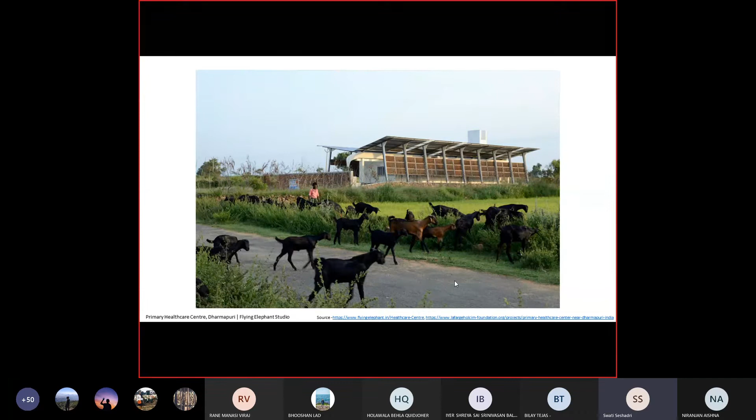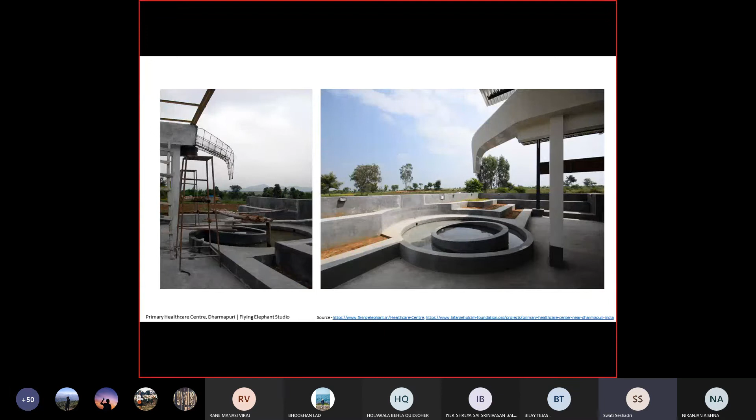These are seen, and I think Kimaya covered the materials and how etc. So I'm going to move past that a little bit and go towards the ground plan.

As you already know, this project is a healthcare center, a small kind of medical center in Dharmapuri, which is in Tamil Nadu. It has quite a hot climatic condition.

What you see on the ground plan is basically one entrance ramp taking you up. To the left is your water feature, which is the collection pond. There's a bit of landscaped area behind that, a stepped terrain that has been created. Centrally located is the building, enveloped by a skin made of thatch mats etc. To the right is your water tank.

So what we are looking at is just trying to understand how this entire thing actually works with reference to your building and how the water system comes together. Basically the whole central spout or water element running through the roof, which holds the roof together, is becoming a spine in the center.

So you have a larger water body here, and you have the water tank to the right. What happens essentially is that there is a ridge somewhere in the middle, so half the water is then sloped towards your water feature.

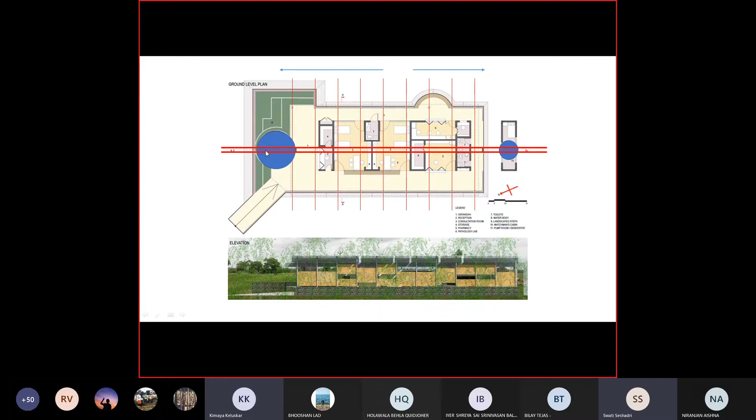Swati, just be louder. I have to be louder because of the background disturbance. You're in the computer lab, no? Yeah, yeah, am I? Is it better now? Yeah, I think so. Aaradhya, are you okay with it? Her voice was muffled because of that background disturbance, so it wasn't very clear while she was speaking, but now it's better, right? Yeah, now it's better.

Okay, cool. So you have your water feature to the left, and then you have your water tank to the right. There is a certain ridge in the middle that will slope your water half to the front and half to the back.

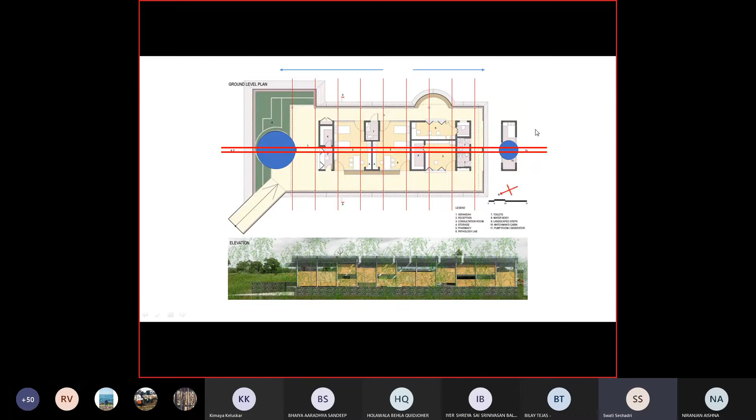So essentially, when you receive rainwater, half of it runs off to your water pond in the front of the building, and the rest goes to the rainwater harvesting tank, which is in a vertical format that has been designed.

I'll just show you this. So that's your tank, which is vertically stacked. Somewhere at this level is where the inlet for the rainwater harvesting tank is, and you'll hold that water for a while, as long as you need it, and that can eventually be used for landscaping and other purposes.

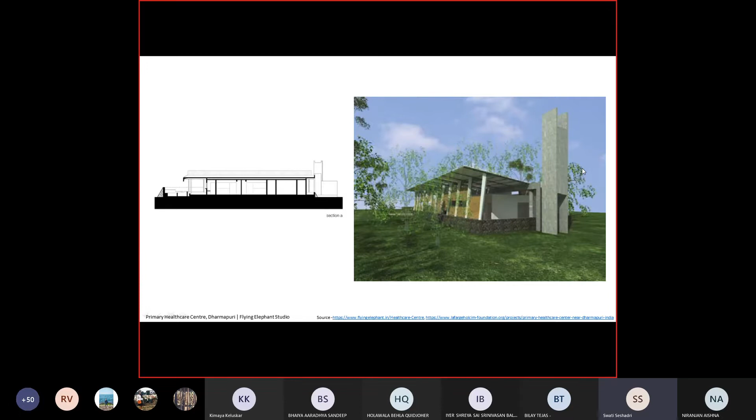I know this image is not the clearest, but this is what's available. So essentially, to understand how this system works, after your spine has taken half the water to the tank in the front, to the pond in the front, and half to the tank at the back, the overflow of both these is connected to a recharge pit.

So this water, when it overflows, goes into a recharge pit here. You're recharging the groundwater in a very arid situation where the groundwater is less and the soil doesn't have much water already. Whatever overflow is there at your rainwater harvesting tank will also run into your recharge pit, and that's how you recharge your groundwater in this area.

The toilets are connected to a septic tank at the back, where it's getting treated and then eventually dispersed into the ground. This is a section showing the same thing we discussed - half the water going to the front and half to the back, connecting into this tank, which then overflows into the recharge pit and eventually gets used in that manner.

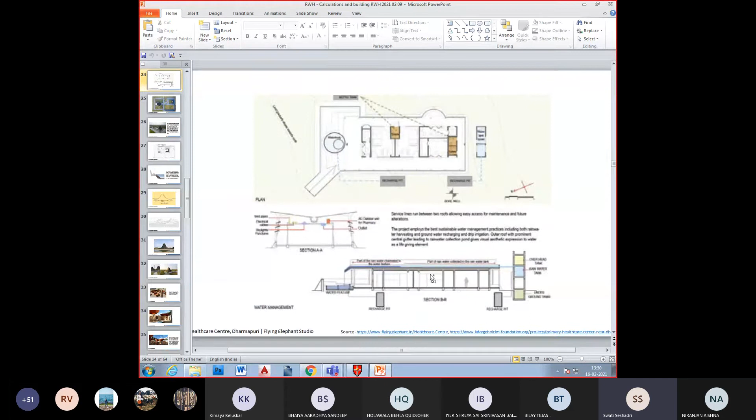So, Swati, can you zoom into the details? Can you zoom into the section and show them? The image that's there is not a good image. But I can just run through it with my cursor if it's visible now. Yeah, your cursor is visible. Okay, I'll just show you some of it.

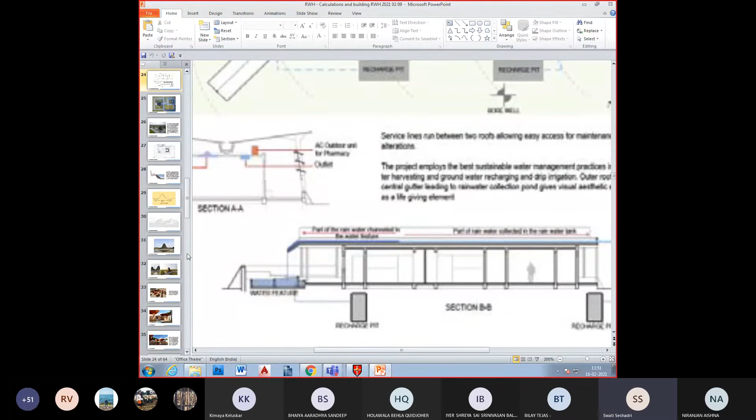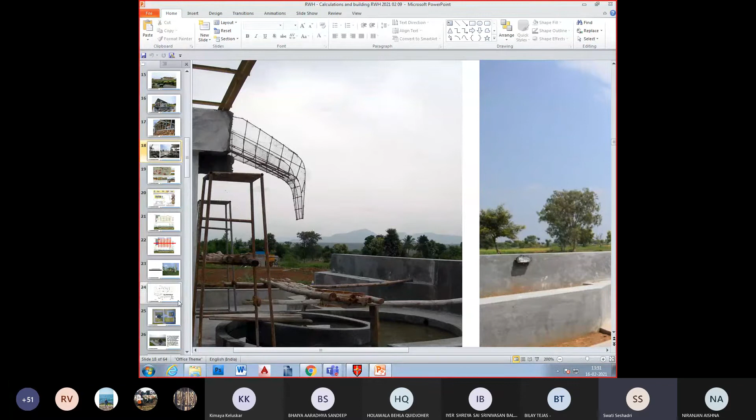This was one of the interesting images of the construction situation where the spout is sloped entirely to allow the water to run off quickly into this water feature. In this area, the same thing is happening in the section shown. I'll show you through this section, I think it will be better. Basically this is sloping towards the water feature, and then at the back it's connected into the rainwater harvesting tank. That's what's happening in this very unclear image.

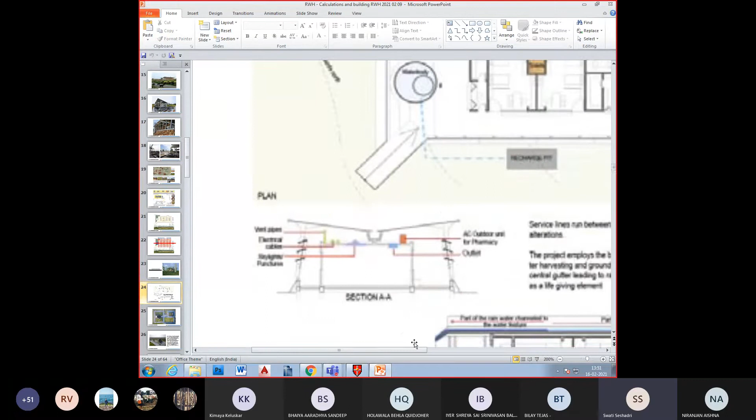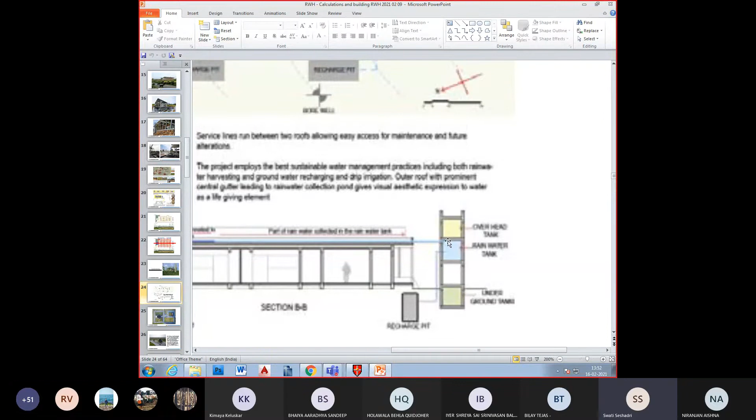So half of it is in the front, and the rest of it is sloping towards the back. The connection is at this level, so that there is an inlet to the rainwater harvesting tank.

Is that clear? Should we move to the next one, Kimaya, or is there anything you would like to add? No, I think you've covered it. We can go to the next one.

Kimaya, I had a doubt. I was using a similar system for my project. The water feature towards the left, that is the pond - at what height should the overflow pipe be in the pond? If the depth of the pond is 60 centimeters, that should be calculated by the amount of rainfall in that area. But is there any calculation that decides the level of the overflow pipe?

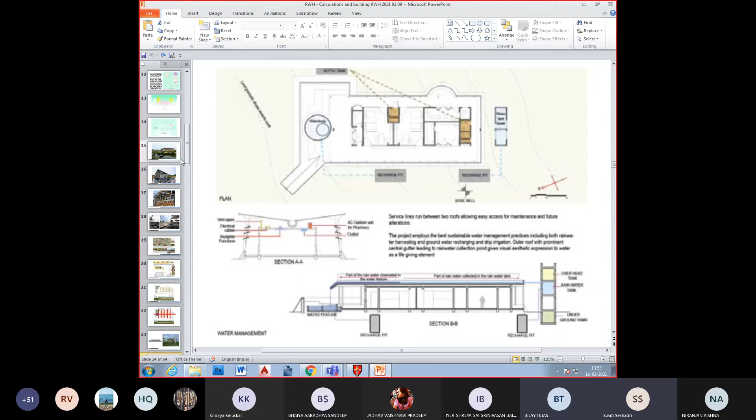No, there is no such calculation to decide the level of the overflow pipe, but as you see in this image, it's right at the top of the rim. The rim that you want as a clear rim - like in the inner circle you see, it's the depression. When I say depression, it's the slant where the cursor is, that's the lowest point, and then there is a highest point. So it's more like an inbuilt kind of overflow that they have created. As soon as the water reaches this lowest point of the rim, any excess water is going to overflow into the next ring.

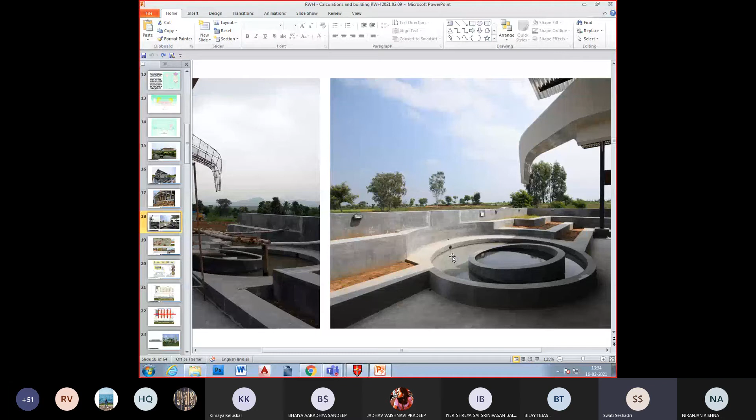Now in that ring also, if you see, there is a cutout in the circle on the left hand side - that is another overflow pipe. The moment there is certain water trickling, there will be other water also trickling in. Only in the monsoon will the whole pipe have water trickling out. Otherwise in other seasons, it's going to be a little water - more like a stream that runs across. Thank you. Welcome.

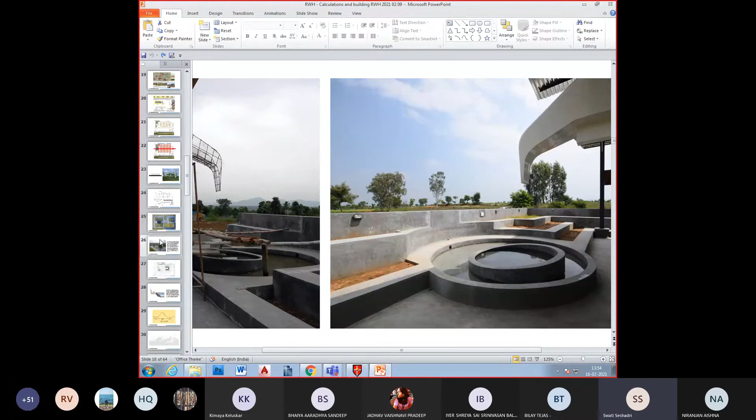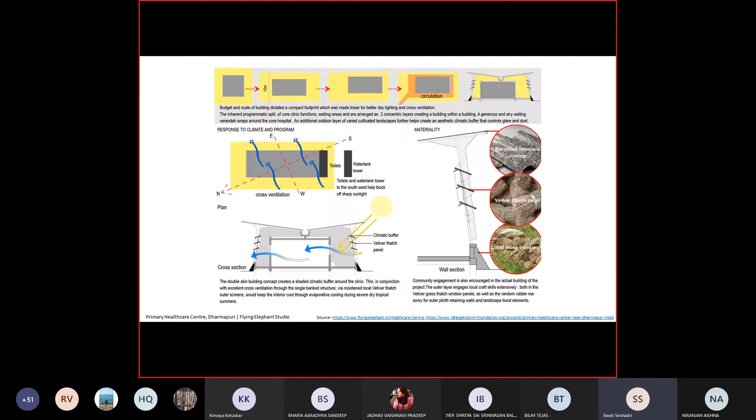Just to add to that - another thing is that aesthetically, sometimes you want to have that feel of the infinity pool, where the water is right at the topmost rim of the built form, so that you feel there is a seamless line of water, and that edge is no longer seen as a trough. So depending on what you want in terms of the aesthetic appearance of that system, you can decide your overflow pipe accordingly.

Okay? Okay. Yeah, continue, sir.

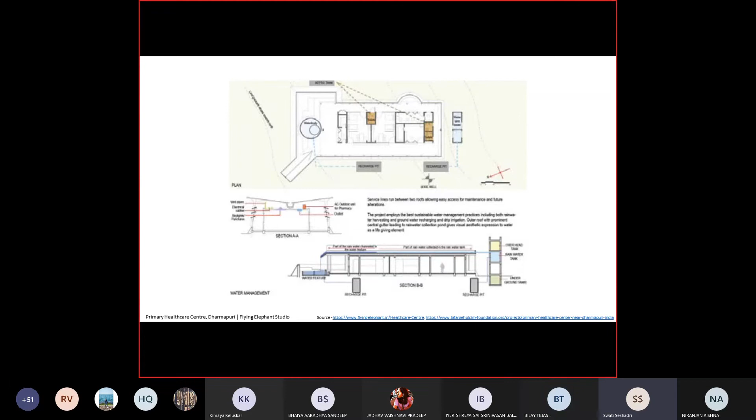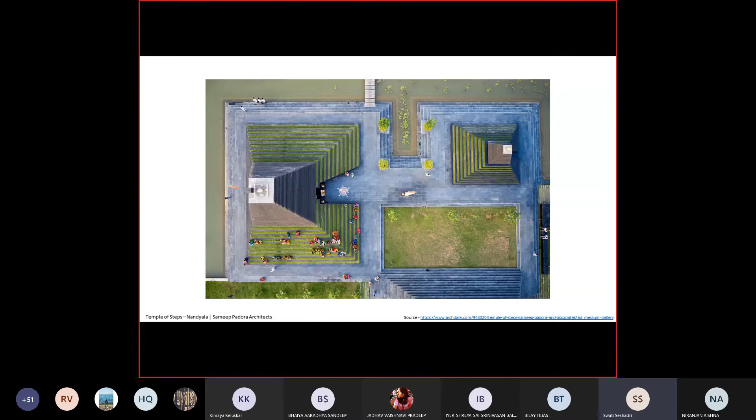So we're just looking at another project which also has an interesting water story, and that is largely the intent of the project. The rest of it, in terms of architectural intervention, is also woven around the same idea of water and experience in the building. This project is based in Nandyala, Andhra Pradesh, which has an extreme climate - the heat they experience is extreme. It's also done from the point of view of trying to keep the entire space cool, but also, because it's a place of worship, there is that connection with water that has been integrated.

So this kind of replicates the whole idea of a temple in South India, and the idea of a stepwell or the Pushkarni tank, something we had seen even in Hampi, where the stepwell is called the Pushkarni tank, the water tank.

Basically, what's happening is there was a canal system already present in this area, which was running dry because of the extreme climate. So all the chili farms etc. were not getting water through this canal system anymore, but essentially the canal system was built for that.

So this intervention tried to look at regeneration of the groundwater again, and the water from the quarries was taken in here. The overflow from the quarries was channeled here, and this water allows for groundwater seepage to happen and regenerate that entire area.

Basically you have a kund in the front and a kund in the back, and this water is seeping into the ground. So they are recharging the groundwater through this project, and the rest of it is stepping up, with your temple formation in the same manner.

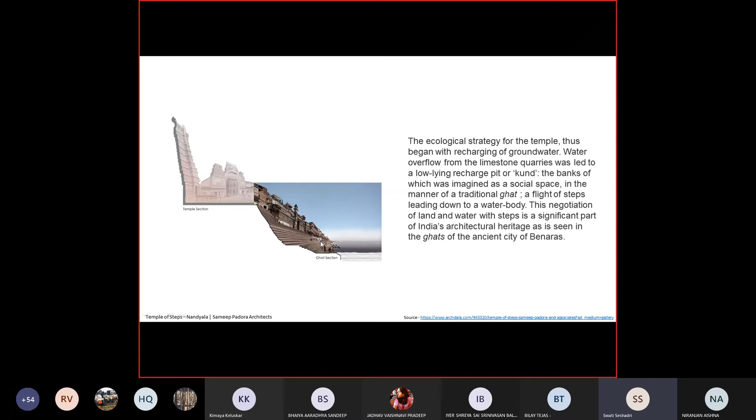Essentially, what they're trying to do is section the ghat itself. The ghats were also built to have this connection with water for easy access, and the water was used for multiple reasons. Also importantly, because the shrines were placed along these areas, the connection between water and shrine was pronounced through the building of the ghats.

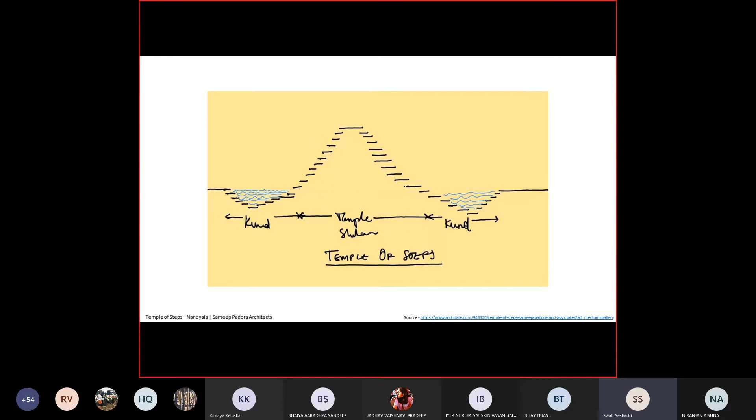So it's the same idea taken into this project, scaled down and applied as an experience. Holding water on all four sides reduces the temperature within the temple itself and keeps the shrine area cool. So these are a few details that you see.

These are basically how the junction between the step and the water will happen, whether one would do it in brick material or concrete material, but that's left to the construction aspect. These were done in stone essentially, in black stone.

The same material is stepped up to create your temple shrine itself. That's the walkway, supported with a member at the bottom.

See the summer, the water level can rise and fall. Coming back to where the overflow would be connected, that's how much you can hold it up to, whatever your level of holding the water will be. So if I don't want the water to exceed this limit, that's where the overflow level will be.

That's something we need to decide. Beyond this, if it's going to flood my side, that's probably where you'll cut it off. Also from the aesthetic point of view, at what level do you want to hold the water up to? What kind of experience are you creating? That will allow you to decide where you want your overflow level.

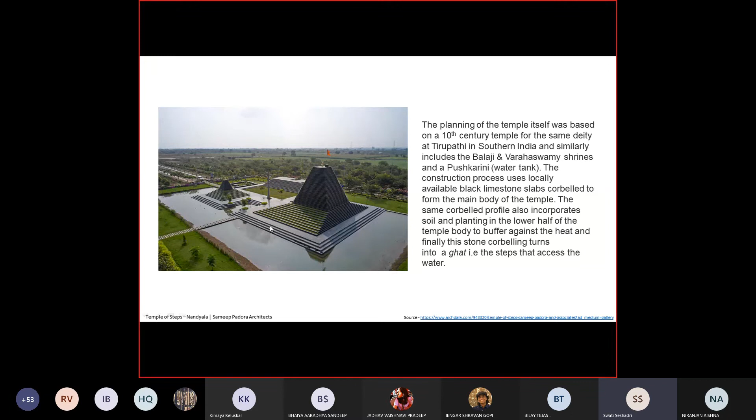Kimaya, would you like to add anything here? That you see from all sides.

Basically I wanted them to look at the scale. Here the scale matters a lot in terms of the superstructure as well as the land, and how the water actually flows from the topmost structure right till the percolation pits in the gardens or lawns. At the same time, it's not only about harvesting water, but coupling it up with the whole program of social interactive spaces and things like that. So how architecture or the built form itself has different roles to play.

So it just makes your architecture much more functional, and it's no more looked at as systems which are separate that come together, but more integral within the architectural form itself. It's also an experiential aspect, and people can spend time here, with a whole interaction with the outside space that they have created.

It's something similar to what Mandu is, about celebration of water. So it's not only respecting the resource of water, but at the same time it also celebrates the whole joyous, retreat, or recreational attributes that water can offer to mankind.

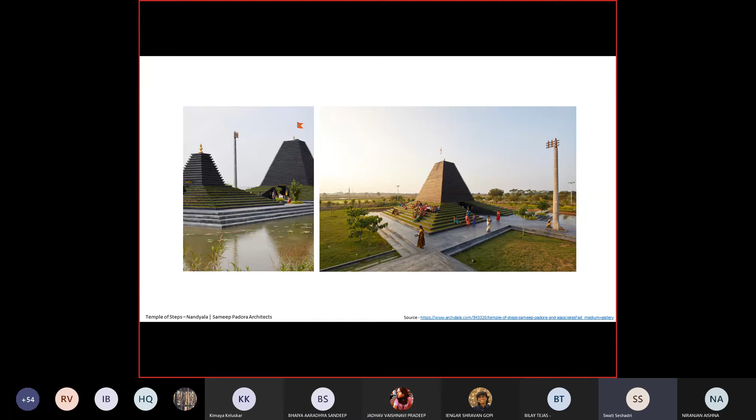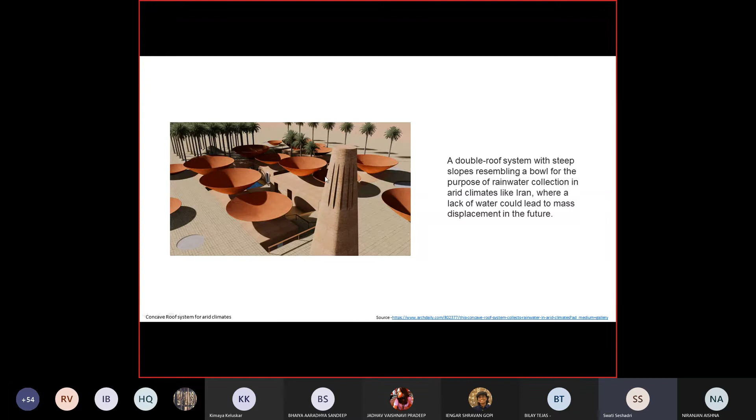So it's essentially a double roof system where you have this kind of concave bowl happening at the top, and then the second roof happening at the bottom. We look at how the whole thing comes together, and it becomes an experiential kind of project.

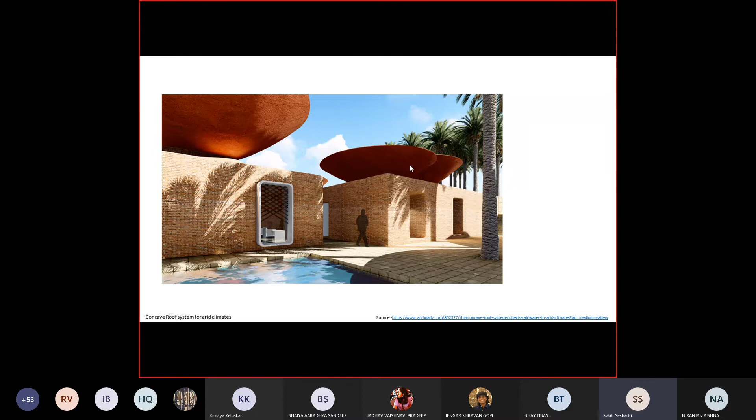So yeah, these are some of the views. You can look at the scale of this bowl - it's not a small thing sitting on your roof. It's as large as the expanse of the roof, creating that kind of bold stroke, as well as harvesting as much water as might fall on it, with the intent of maximizing the holding possibility.

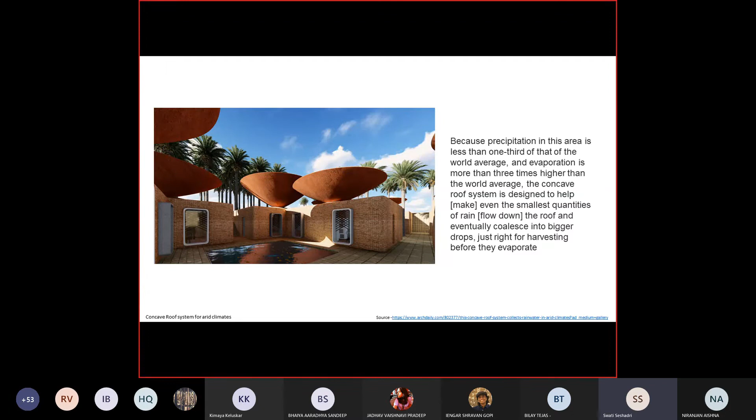The other thing is that because the rainwater they receive is very low, the point is that incident rainfall is always supposed to be the cleanest water. So as soon as it hits this bowl, they want to take it into another tank which will hold it - it's cleaner water that you're tapping into immediately, not contaminated on other surfaces, but running directly to the reservoir or tank they want to hold it in.

So again, if you observe carefully, there is this kind of dent they have created, like a convex roof at the bottom, on which your concave surface is actually sitting. These are like terracotta bowls sitting on top of your second skin.

So, keeping these ideas in mind, they've tried to put it into their proposal, which is a school. They've placed their classrooms all along, and taken pathways that intercept the entire mass, with the pathways centrally located to create that indoor-outdoor possibility, as well as a shaded system for the corridors within.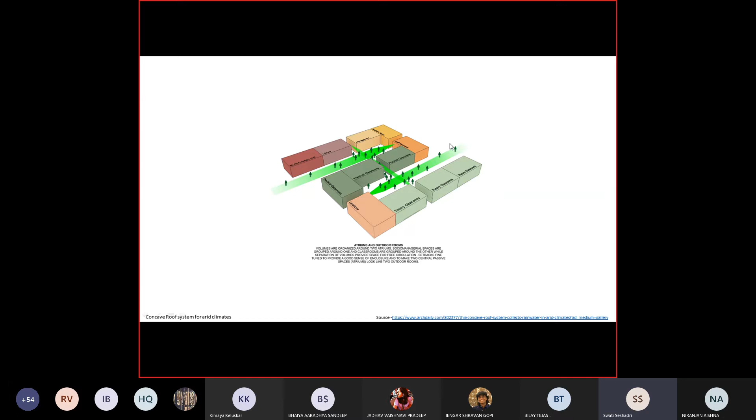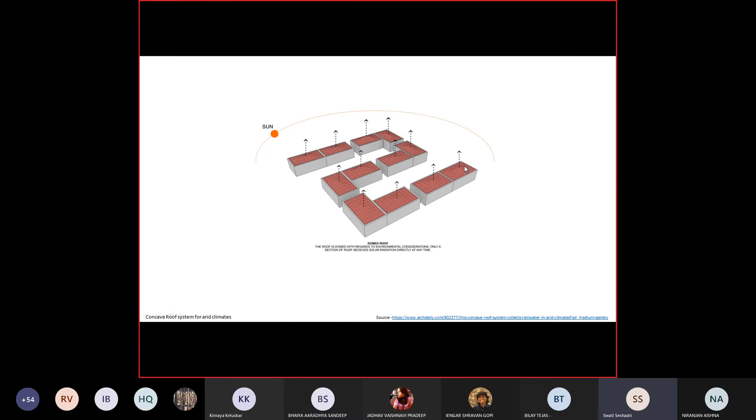And then above your volumes, you have a domed roof or convex roof on which the concave bowls are going to come and sit. So essentially, in the section you're getting this kind of bowl happening here, and the opposite happening at the bottom. So if there's any rainfall falling here, it's sloping towards the edges, and that water can be held as well.

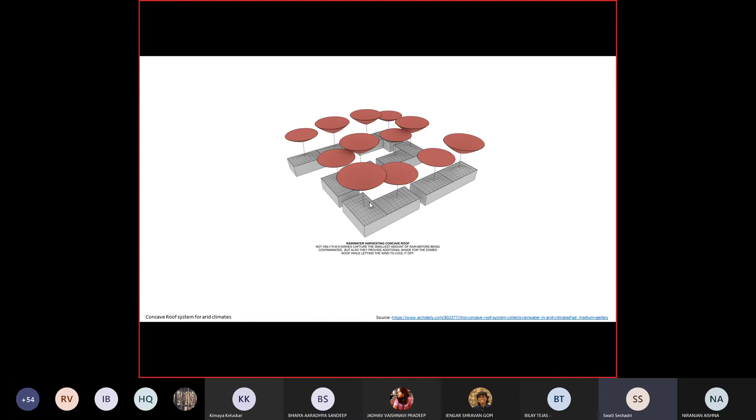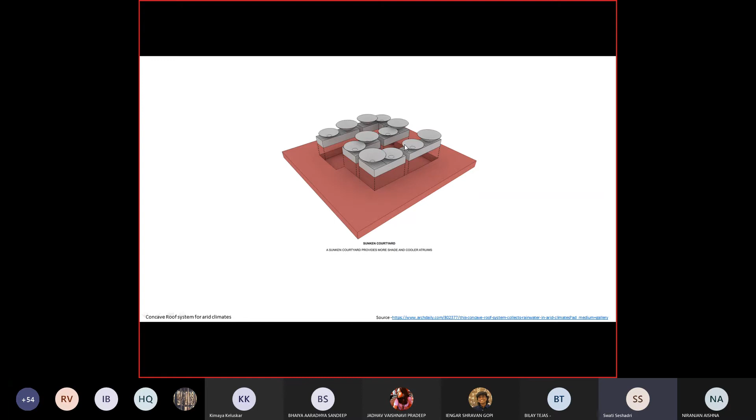And what has been done is that all your access points have been sunken. The entire volumetric possibility created has been made in a sunken courtyard, so the internal areas can be kept cool, working with the thermal mass of the ground as well. So your buildings remain cool, and your thoroughfares are also in a shaded portion. These are your access points from where you get in.

This is just aesthetically also included, more concave roofs which will hold more water. Of course, it needs to be connected back into the system in that case.

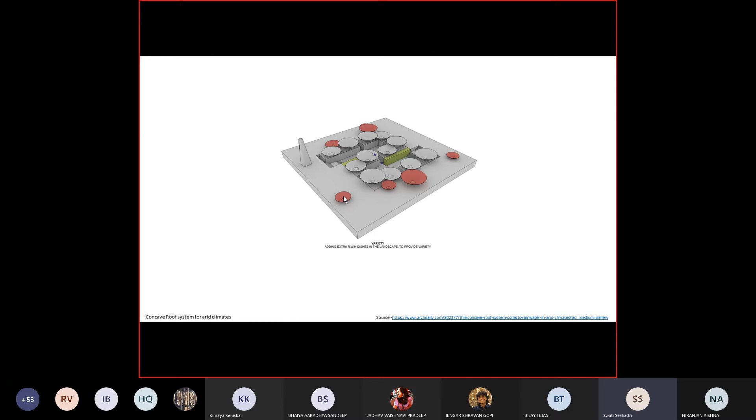This was also interesting because just look at how they've treated the windows. In some cases, they have had more projections towards the outside, and in some cases, they've inset it a lot more, so that the incident heat from the sun is not very harsh. So there is enough space before the sun hits the room that is inside, and in that sense you are also able to keep the inside a little cooler.

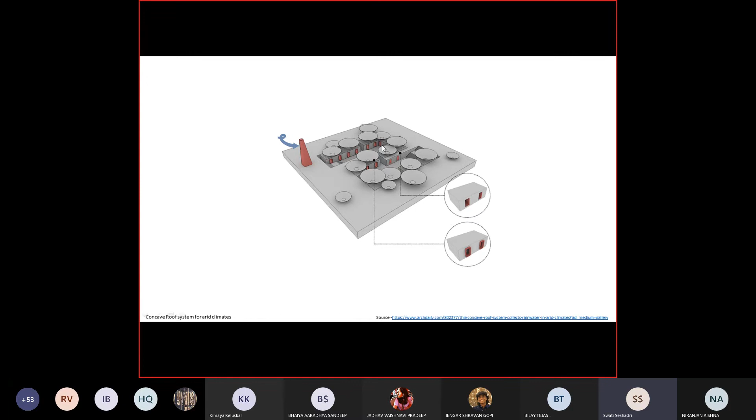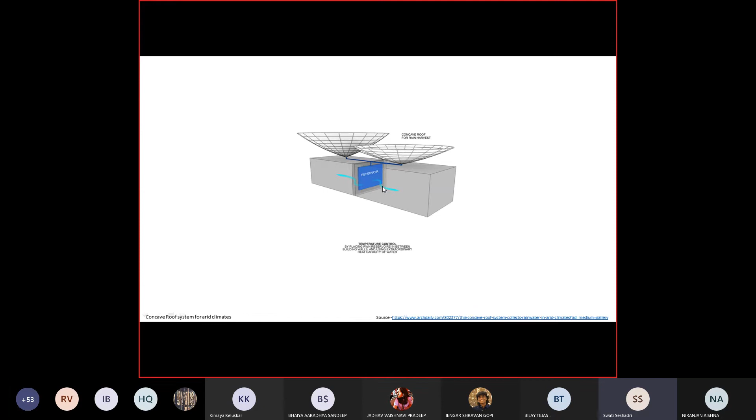And there is this wind tower that is placed, which is connected to your entire water system that they have created. So if you look at what they've done here, basically there is this point at the bottom which is collecting the water. All your concave bowls are collecting the water and taking it to the lowest point, and that is connected to the reservoir. What they've done is that the reservoir is actually located between two volumes, so in a sense that cools the entire larger block as well. So the water is woven into the entire story of how you built your architectural blocks as well.

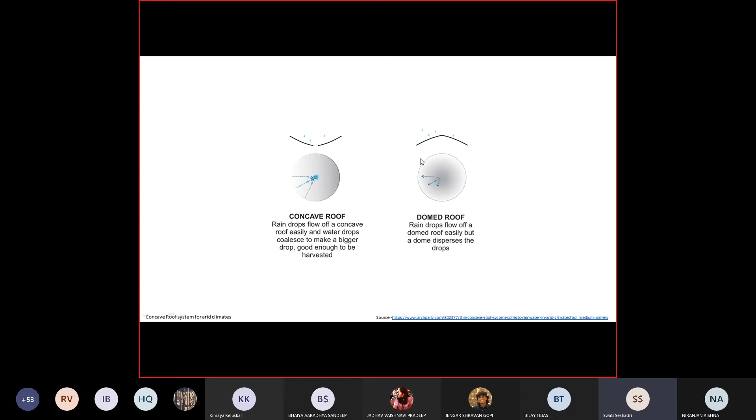So this is what we were talking about, this whole convex and concave situation, where this allows you to take it down to the lowest point quickly. At that point, and at the intersection of these two roofs, is where the cooling of the air happens. So whatever your domed roof is, basically it's shaded because of the existence of this bowl that is sitting on top of it, which is in terracotta. And then the air that passes through it is already cooling down. So the air that you get around your entire campus, in a sense, is also a little bit cooler, and it can settle down. And your roof, the second skin that you have at the lower level, is already cooling down too. So basically, you're not getting a very harsh hit from the top, and that's why your internal spaces are going to be much cooler because of the way that they've designed it.

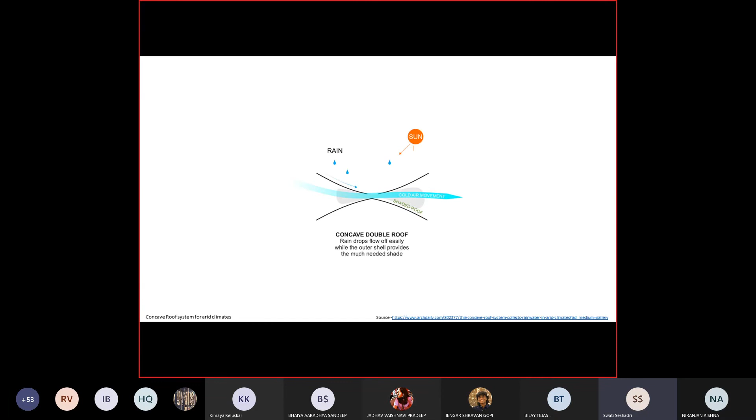So that's how this project, or the idea, had come up with. We have come up with.

So they're saying that about 923 square meters of the concave roof is expected to hold about 28 cubic meters of water, so one could calculate how much that is. Basically, then we could also know what the height of these bowls are in terms of how much water they are holding, with an efficiency of 60%.

Actually, Kimaya, is it possible for you to elaborate a little bit more on this efficiency aspect of it and how that would work?

Sorry, I was on mute. You mean to say in terms of the efficiency, the runoff efficiency? Yeah, so basically, it is to do with the form, because it's like a deep saucer based form with a collecting surface, and then because it's mud again, the covering form, the material, I mean the ability to absorb water — everything then comes into it, and that's why the efficiency is about 60%. Because you also have to understand it's an arid climate, right? So the evapotranspiration rate is also going to be higher. So all those factors have clubbed together, and that's why the number has come to 60% and not 80 or 90%.

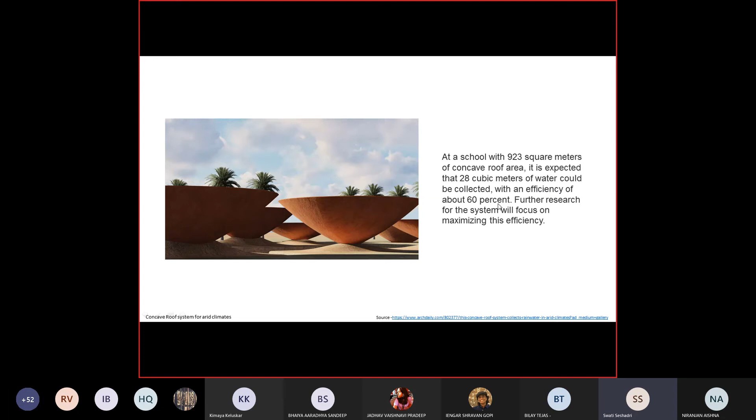Yeah, is there anything else, Swati, you want me to talk about? I think from my side, that's good enough. Yeah, yeah, from my side, that's it. Yeah, I mean, that was my question. It's answered.

So guys, do you have any questions on this one? Shravan has raised his hand. Yeah, sorry, my chat isn't working, it seems, because I can't read anything on my PC and nothing I sent seems to be read. Anyway, what I was asking is that I understand the concave roof helps collect the rainwater better, and also it's necessary for the evaporation. But how exactly is it better at collecting the water before it evaporates compared to like a regular gutter system that leads through a tank?

See, Shravan, you have to understand these are all elements of collecting water. So whenever those trenches or tanks that you're talking about are just collecting the entire surface runoff, it is also collecting all the dirt as the surface has been washing against your ground planes, and things like that — it'll have your car detergent washes and animal poop and all. The ones which are there at the terrace level are much higher in sense of quality. So what happens is that you can actually cleanse this water in such a way that it becomes potable.

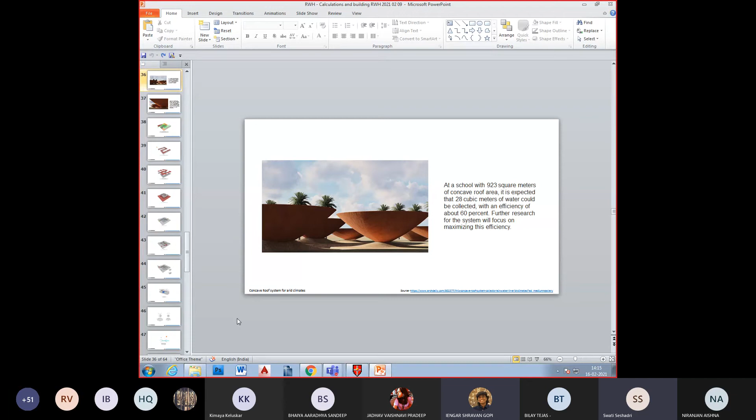I think some of that also comes from the intent of how they placed the water tanks between all the blocks. Basically, if you divide these into two kinds of blocks, the reservoir sits right in the middle, and that channels from both sides into that central reservoir. So it's kind of allowing for the cooling of both sides to happen as well.

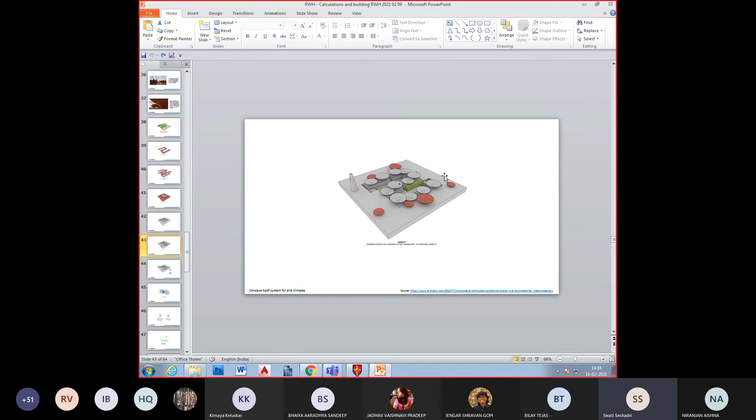That's when you kind of need two of them. I think aesthetically also, if you just had one very large one, it would look out of scale. Does that sound right? Yes, yes.

So we have 5 minutes. Any ideas or questions anyone has? Because if we start the calculation, we'll have to finish it in one go. Rati, yes, please.

Hi, so about the overflow pipe for the tank. If there is a septic tank or an STP on site, do you have to provide an overflow pipe for that as well? And if you have an STP and a septic tank, basically for solid waste collection, does it need any overflow? The septic tank won't have an overflow pipe, but it will have a vent pipe for the aeration part, so that you introduce oxygen. But you'll always have a freeboard within the tank.

That will not require overflow because you always design for the highest capacity, and it's a constant ongoing process, not a storage process. It's continuously functional. So even for an STP you won't require an overflow pipe, because that would mean allowing contamination to get exposed to the outer world, which is not advisable, given the kind of pollutants it has. It will have a negative impact on the health of human beings, and even animals around.

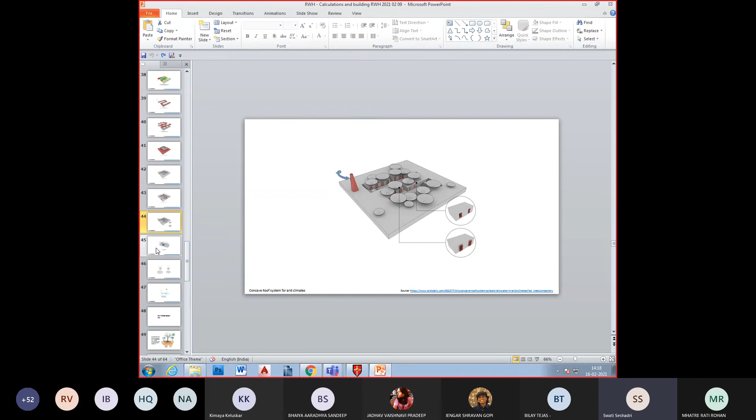You'll always add up more, so you'll always design the tank at 1.5 times capacity, which takes care of the maximum capacity plus 50% extra, acting as a mitigation point in case there is excess usage beyond the stipulated time or number of flushes. That 50% will take care of that.

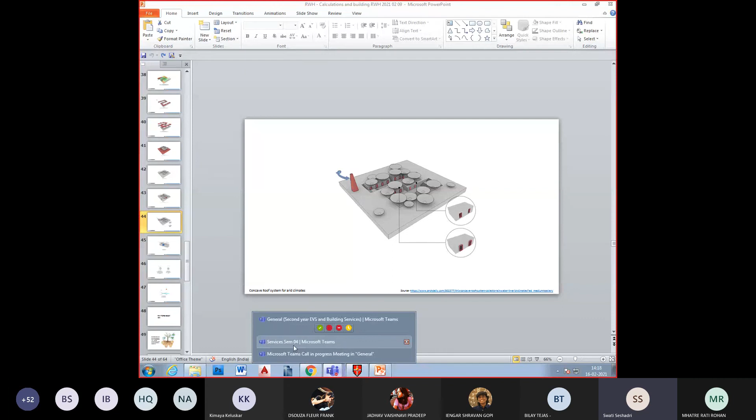How far does a recharge well have to be from the building foundations for it to be safe? It should be as close as possible, but it also depends on your design and the site, and how you're locating your buildings. Closer placement means minimal loss of water and energy, and you'll also reduce the pipelines, so maintenance and operations become easier. It's advisable that it be closer, but if that's not possible, you can place it further.

Depending on the topography, you'll have to introduce a pumping system to ensure there's a flow of water. It won't have any effect on the building foundations if it's too close.

There are newer systems which have embedded water tanks within the foundation system itself, so it doesn't hamper the foundations. These inbuilt tanks are built below the plinth. I did an RCC structure with a tank below, but that tank is my deck area, which I converted into a tank.

What will be the details of retention ponds and trench beds connected to it? A retention pond is more like a pond kind of system, a shallow pond with inclined walls on either side.

Maybe we can add a few diagrams. Next time when we talk about phytoremediation, you could look at the section of the oxidation pond, which can be replicated for a retention pond. The only difference is the retention pond is more about collecting water, and it has a geotextile membrane so the water stays intact and doesn't completely drip out—it trickles down the system.